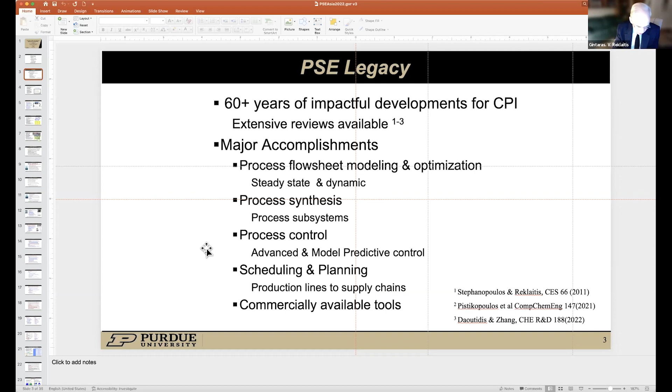Now I'm going to just very briefly recap the key features in each of these technologies. Process flowsheet modeling is now a tool used in the undergraduate program, so very clearly it has permeated the chemical engineering discipline. It started in the 50s with the sequential modular architecture. Over time, constraint handling, flowsheet optimization using SQP approaches, and most importantly, equation-oriented alternatives have developed.

These things have only become possible because of the developments in physical property modeling. Without the model libraries, the databases, the ability to predict properties of mixtures, flow sheeting process simulation would be much retarded. Since those initial waves, group contribution methods and other groups of materials have been characterized with the PhysProps package. Some years ago Dr. Lakshmanan, at one of the FOCAPD meetings, made the bold statement that the sequential modular form of process flow sheeting has now achieved universal adoption. If it did then, it certainly has now.

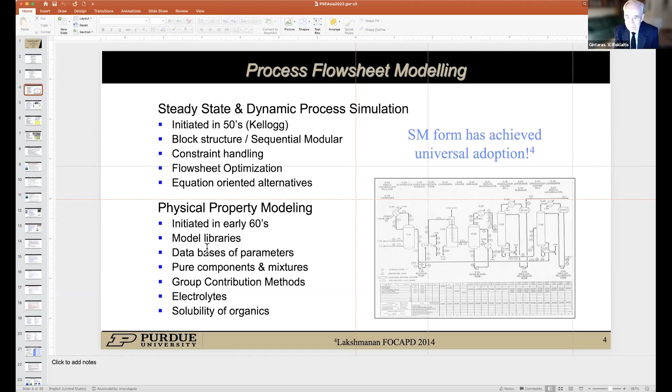In the area of process control, the field has moved forward with data-driven methodology first and foremost, initially in process monitoring using statistical methods, basic feedback control, advanced controller building blocks, various data-driven tuning and performance monitoring systems, and most recently — recent being the 80s — model predictive control, principally linear but increasingly with nonlinear applications, with and without state estimation. The paradigm, seen in most textbooks in process control, is essentially the use of a model to predict how a process should be adjusted over a horizon, and then, of course, the classical solution of only implementing the first period and then repeating the re-estimation process.

A paper back almost 20 years ago by Qin and Badgwell, reviewing the field back then, already claimed that model predictive control is widely adopted in refinery and petrochemicals, and certainly it will be increasingly used in other sectors, such as, for example, the pharmaceutical industry.

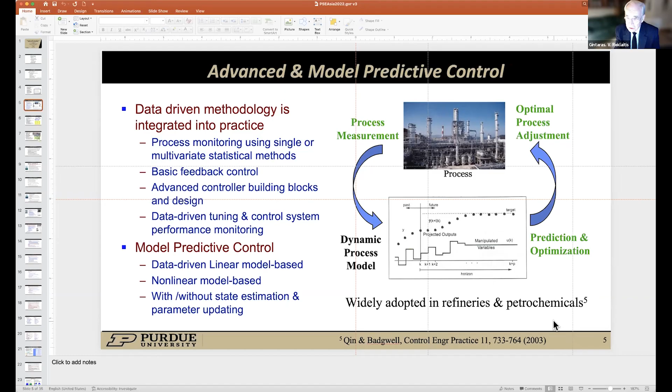The other area of great importance has been process synthesis. Again, a number of problem categories have been addressed, from heat and power networks to separation systems to mass exchange networks, attainable regions. The approaches have really spanned the range from heuristic or thermodynamic constructions like the pinch method, to superstructures, to math programming to solve these superstructure optimization problems, and actually some very interesting work in recent years in systematic enumeration, which boils the superstructure problem down to a smaller set of structures. I think it's fair to say the industrial impact, particularly on the heat and power network side, has been substantial.

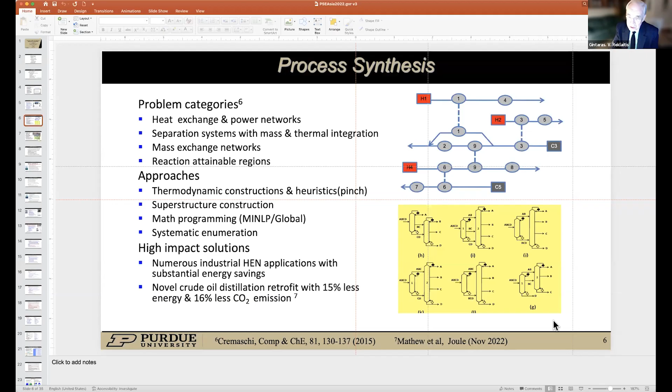Hundreds of papers have been published and continue to be published illustrating how important heat integration and power integration can be. I'd point you to a very interesting application by my colleague's group, Professor Rakesh Agrawal. They just published a paper jointly with colleagues from ExxonMobil in which they demonstrate that by using systematic methodologies, they were able to improve the classical crude oil distillation through a retrofit that has 15% less energy and 16% less CO2 emission. This illustrates that significant progress can be made even in industrial installations that one would think have already been so well polished that there isn't much more room for improvement. A clear example where PSE can still have an impact.

Planning and scheduling has also been a very active area, one that I've been personally interested in, ranging from multi-period MILP applications to refineries, utility systems, water, and so forth. Likewise, in the scheduling area, lots of really exciting progress in terms of how to handle these complex combinatorial problems. A very nice review paper published back in 2014 recaps some of the key ideas. However, the field has kept moving forward, and we recently welcomed the book on scheduling produced by Professor Maravelias, continuing to show that there is significant work yet to be done in this important area.

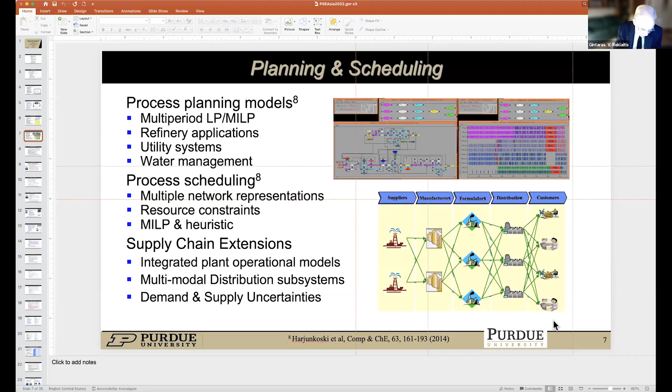As I mentioned, while it's important that the field has made these contributions and published them, it is even more important that these tools be implemented in practice. And it's really noteworthy that there have been many important software implementations now available to industry, and many of these have been really involved, expensive, and long-term developments.

For example, in the flow sheeting area, Aspen Plus originated with an Energy Department and MIT project launched in the mid-70s. The gPROMS work started in the mid-60s at Imperial, and both of those packages are now licensed and supported—in the former case through Emerson, in the latter case recently through Siemens.

In the process synthesis area, there are many applications, particularly in heat and power. On the separation train side, there are a few commercial packages, but lots of academic and in-house work. And of course, in the advanced process control, MPC area, all DCS vendors offer capabilities in those areas.

The scheduling planning domain is really such a broad domain. It goes much beyond process systems—as we practice it, it really pervades all manufacturing. So there's plenty of commercial packages available. I'd mention one that one of my colleagues started some years ago, Advanced Process Combinatorics. Their software has been actively used in industry for the past 20 years. This is an area with continuing challenges just because of combinatorial complexity, so I'm sure we will see more progress as time progresses.

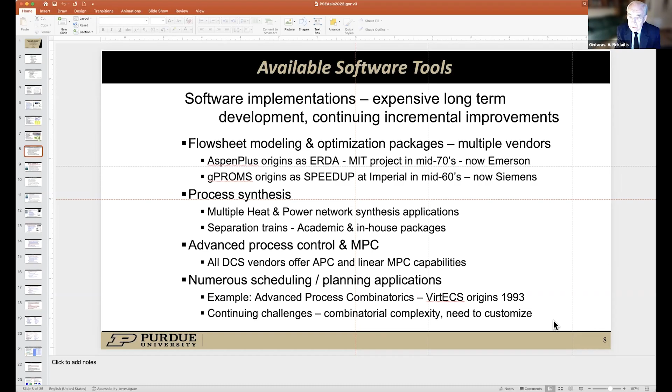Now, in the area of PSE applications, in the past and in the present, our focus has been to support design and operations in the chemical process industries. It is interesting to question what are the challenges in the future.

I'd point you to a recent U.S. National Academy study, published earlier this year, in which the panel reviewed what these grand challenge areas are. They range from decarbonization of energy systems, to sustainable engineering, to targeted and accessible medicine, to flexible manufacturing and circular materials. And again, the panel recognized how important tools are to the future of chemical engineers if we are going to make progress in those areas.

Now, the key features of these grand challenge areas: they all involve large-scale systems, they all require an integrated systems perspective, they're multi-scale in temporal and spatial dimensions, they always involve uncertainty in models, parameters, or data, and they all inherently require some quantitative risk assessment to support these system-level decisions. Most importantly, they also require in-depth knowledge of the application, and that opens them up very nicely to our PSE community, populated by chemical engineers who have a very good understanding of energy systems, healthcare-related issues, and so forth.

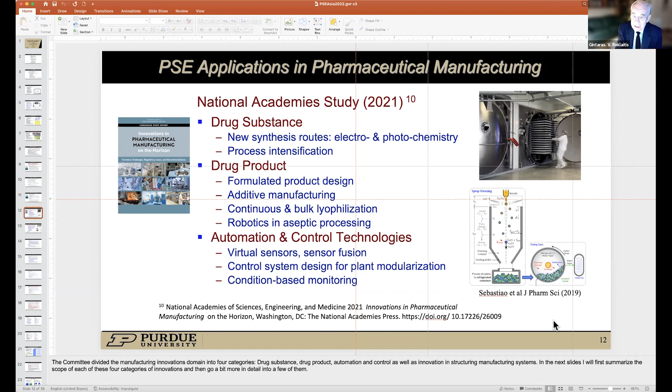There's included in there a discussion of innovative manufacturing networks. Again, something that is core to PSE, where we're not just at batch and not just at continuous, but at highly automated hyper-production lines, which require integrated control and scheduling. The idea of modularization is really important to the industry, and it has interesting questions in terms of control system design, safety, and security. There is even work going on in portable point-of-care systems, which would really, in some sense, be a prime challenge for PSE, because such a system really has to operate with real-time release. That is, when the dosage is produced, the patient can consume it without further quality control.

Of course, the word digital twin again appears in the pharma innovation study as well. So I invite you to look at that document in more detail. I think you'll be amazed at how central PSE is to really innovations in pharmaceutical manufacturing.

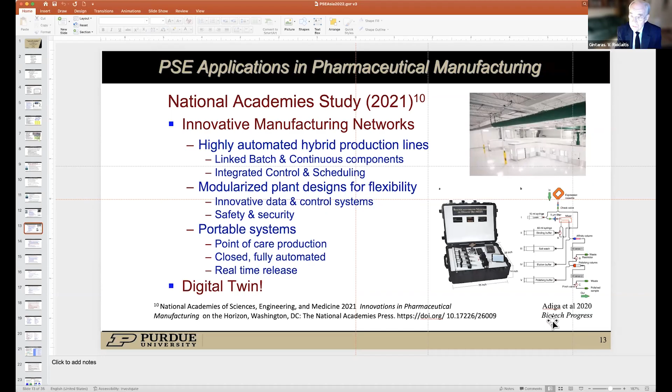So the recurrent themes in the National Academy studies, and certainly in many other studies on the future of manufacturing: increased digitalization in the generation, management, and use of data, the effective use of this data to build high-fidelity models, the use of such models, in this context referred to as digital twins, to guide both the design and to support real-time operations. These are really key parts of each of these studies. And of course, the digitalization and digital twin theme appears in all of them. And, you know, us academic cynics could well say, are these just buzzwords, or does this really represent real change? And what new challenges does this digitalization wave pose for PSE?

The assertion I would make is that from the perspective of PSE, digitalization is not a revolution. Rather, it is a very logical evolution of PSE. And it will be achieved, and is being achieved, by exploiting advances in computing and information technology, which is what our community has been doing since its inception. When you look at all of the areas where progress has been made, it has always been made by pushing the envelope of what you can do with the computing information technology available at that period in time.

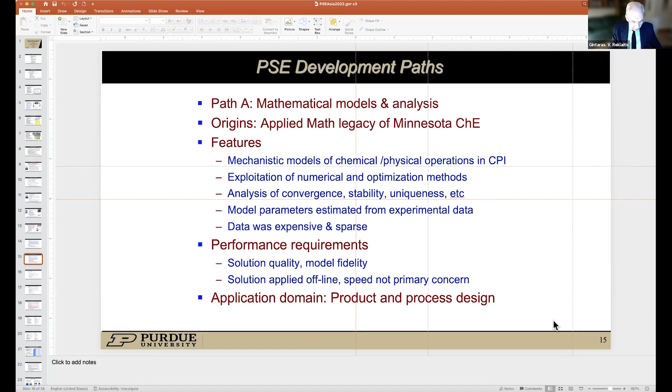The second development path was really the data-driven path, even in its inception. It was really of industrial origin. It was our industrial colleagues who worried about process monitoring and control.

And the features of this path was initially make decisions from data using statistical methods, then build simplified data-driven or linear models or surrogate models to help make those decisions.

The solutions required were in real time, or at least in a time scale that made them relevant to the dynamics of the operation. This was a theme in which data was abundant. The concern was really more about the quality, the reliability, and the dispersed nature of the data. For this development path, the performance requirements were really speed of solution. There was a recognition that the solutions would be updated frequently.

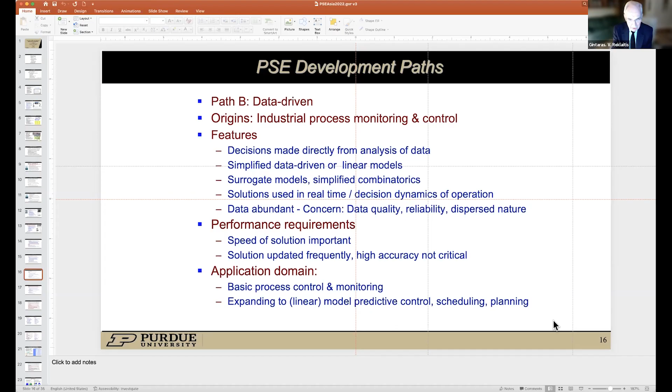Look at linear model predictive control. High accuracy was not critical, however, speed was. And the applications, first and foremost, were in process monitoring and control, and then gradually expanded to model predictive control, scheduling, and planning, where one could make use of relatively simple linear or perhaps mixed-integer linear models.

Now the third path, which is the one that we're embarked with now, the digitalization digital twin, I would view to be a logical merger of paths A and B. It builds on PSE legacy, and it again takes advantage of advances in computing, data storage, access to data at high speeds that we currently are enjoying.

And the features are pretty obvious. We deal with large and diverse data flows from multiple sources occurring at different frequencies and even different levels of accuracy. High fidelity models for design and operations, that's where the digital twin comes in. This high fidelity is obtained by combining the mechanistic with data-driven components, and that's where we get the hybrid models.

And then given what we have available in terms of data and models, a really key component is always model predictions, dealing with the effects of uncertainty, both structural, parametric, and the input data. And of course, for the digital twin concept to be relevant, the digital twin has to change as the process is changing, and therefore model and parameter updating, adaptation using whatever methodologies are relevant, for example Bayesian methodologies, is really, really important.

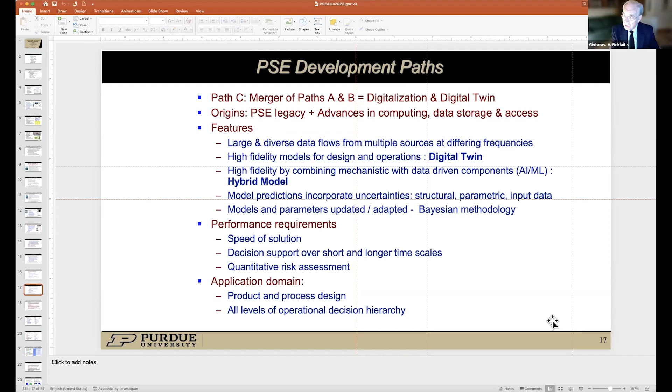Here, the speed of solution does matter, particularly on the operational side - I want to be able to support decisions both at the short term and at the longer time scales. And a decision that is relevant to the modern era has to have quantitative risk assessment. The application domain, of course, is all the domains that PSE traditionally covers, as well as the grand challenge areas that I referred to earlier on.

So given that perspective, then the question is, what more needs to be done? And of course, we always need to do more. We need more capabilities in all of the key areas of process systems engineering.

Approaches in dealing with diverse data and its management remains a key area for research. Effective methodology for building these hybrid models, a software architecture where building and integrating these kinds of models into system-wide models can be enabled. And as always, we need developments to increase computational efficiency and scope.

It is just inherent to PSE that we're always stretching the boundaries of the size of systems and problems that we can deal with. And I will briefly touch on some developments in each of those four areas.

First of all, in the data area, I'm sure you realize that one of the blessings and curses of data in the process and related industries is that the data categories are very broad, both time series and static information - traditional information about streams and unit operating variables, but also information about the status of the resources being used to carry out manufacturing. So status of instruments, of units, of control systems, all constitute important input information for us to make decisions.

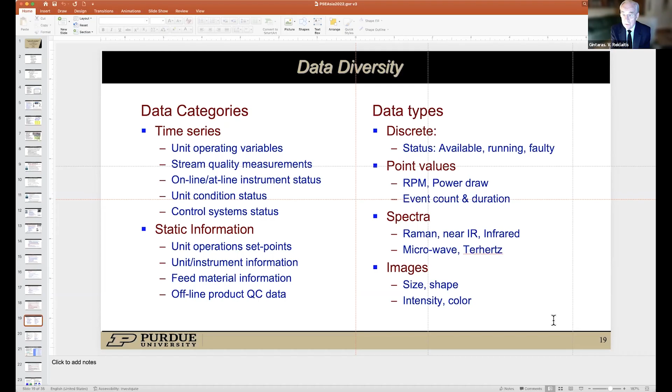Now, given this diversity, the question is, how do you manage that kind of data? Certainly, industry has addressed this by having multiple data repositories, both laboratory information systems, the traditional process historians, information resident on PLCs, MES systems, ERP systems. They have all been implemented in practice.

Unfortunately, they have sort of existed as islands of data. In recent years, there's been a lot of effort in terms of integrating these data into something called data lakes. I think the practice so far has shown that while that is a significant step forward in terms of making this information accessible, it is really not integrated in the sense that it's easy to access all of the data relevant to a given project that may reside in one or more of these systems. And so there is significant work to be done yet in terms of effective data management systems.

Some of the challenges that exist are the fact that there's all kinds of variation in the data quality and data quantity, data fusion, integration of diverse data types in order to allow us to do things like state estimation, where the data inflows into the state estimation model comes from different sources at different frequencies with different error bars on it. How do you take that into account?

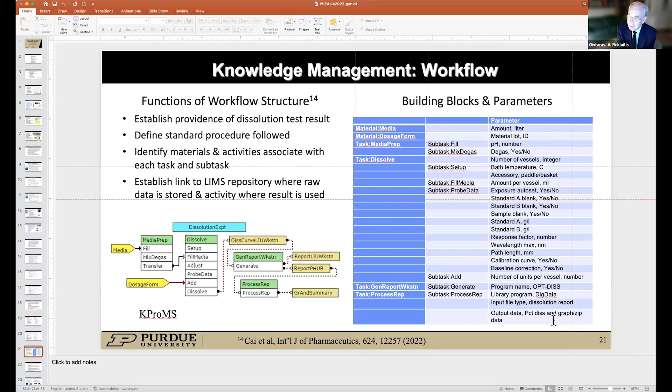I would suggest that if we really want to capture the provenance and the context of the information that our PSE methods will be using, we need some kind of structures that will allow us to do something like this. Now, this is rather primitive. I'm sure there are much better ideas that will come forth.

Let me next talk about the second area of PSE relevance, which is that of methodology for building and adapting hybrid models. Certainly the notion of hybrid models is not a new thing. One sees components in the literature appearing already in the 1990s.

The principal difference, as is pointed out in a very nice review paper by Sansana and co-authors, is they sort of looked at the development of hybrid models as sort of a balance beam, where when you think about it, in the path A of PSE developments, the heavy weight was on the mechanistic side. The data-driven was pretty thin. In the big data era, the reverse happened. And of course, the challenge is to balance that appropriately.

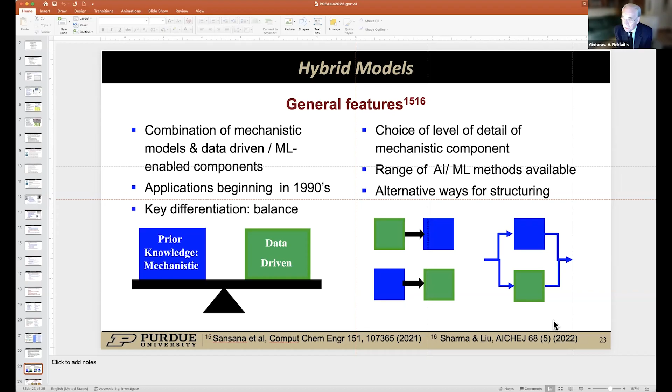As a simple example, I'll show you a pharma application. On the left-hand side, we see a continuous process going from feeders to a tablet press, and the unit operation in the middle is a roller compactor. That unit operation essentially consists of a mechanical device with two parts: a compactor, which takes powders and compresses them into a ribbon, something like a chewing gum ribbon, maybe a bit larger. Then the second part, a two-stage mill, which chops that ribbon up into granules.

The inputs for this kind of model are shown on the center bar—things like feed screw, roll gap, roll pressure, and so forth. There are inputs for the mill section as well, in terms of screen size, screen gap, and mill speed. And there are outputs: throughput, ribbon solid fraction, ribbon thickness. Some of those outputs serve as additional inputs to the mill model, which then produces size distribution.

This is an example where you have aspects of both the serial and parallel structure—a relatively straightforward model that has a mechanistic component dealing with the mechanics of compression of powder and producing a ribbon, a model that takes into account the material relaxation that occurs when the material leaves the rolls, and of course a machine learning milling model.

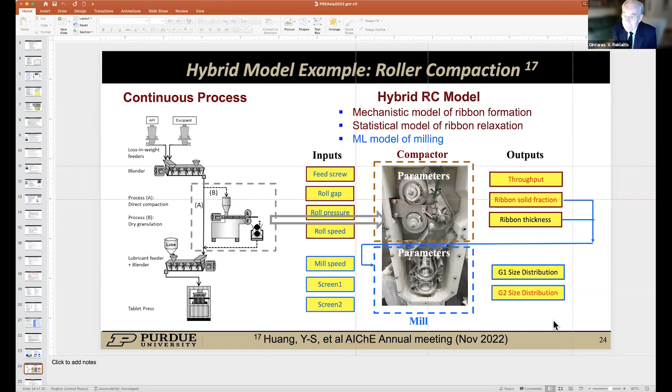One could certainly write population balance models with a breakage kernel for this part of the process. But breakage kernels are typically data-driven models, and people have worked on using machine learning to make those models better. So it's just a simple example of a hybrid model, and clearly there will always be parts of the process where our ability to write mechanistic models with sufficient fidelity is going to be challenged. If we really want to track the process closely, we're going to need machine learning components to it.

So in the area of hybrid models, there have now been several review papers. I will just recap what these are. Certainly, model identification is really a key requirement—we have to build a machine learning model, and come up with the parameters of the mechanistic component. Validation is always a key issue.

Increasingly, people are starting to worry about building hybrid models in a data-sparing mode. The key here is to bring the hybrid model up as quickly as possible, so you don't need an enormous set of data to work with. So how can you build an effective model that is data sparing? Of course, the hybrid model needs to track reality, which changes, so strategies for adaptation of the model are important.

I maintain that any model used to make decisions needs to have prediction of confidence or credible regions, depending on whether you're a Bayesian or a frequentist statistician. The enablers for building these models are really flexible software environments, and this environment needs to be transparent so that these hybrid models can be built, managed, and adapted, and facilitate combining these models into system network models.

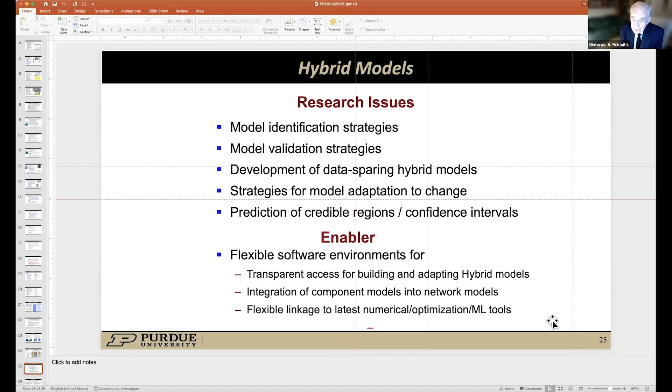Just by way of example, I thought I would show you a development you may not be familiar with, which is the IDAES platform. This is a development launched within the U.S. Department of Energy. It involves several academic partners in addition to the national laboratories—I think colleagues at CMU, West Virginia University, and even Notre Dame are involved. The goal of this project was to provide advanced PSE capabilities to support design optimization of new processes.

The key goal of this effort was to address the weakness in existing systems—the conventional process simulation packages such as Aspen Plus, and algebraic modeling languages such as GAMS that provide functionalities very desirable from an optimization point of view. The simulation packages typically don't do well in optimization because, to a large extent, the optimization occurs through the black box framework.

It's complicated to add new non-standard dynamic models or to modify the existing models, which are often hidden. And of course, uncertainty quantification is difficult within those packages other than simply Monte Carlo. On the other hand, the algebraic modeling languages really are not set up for building reusable process models. They don't make it easy to integrate model libraries, properties, those sorts of things we're used to having in building process models, and they're challenged in terms of handling multiple time and length scales.

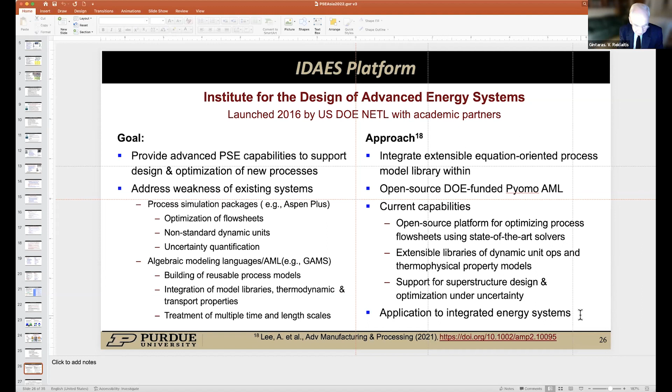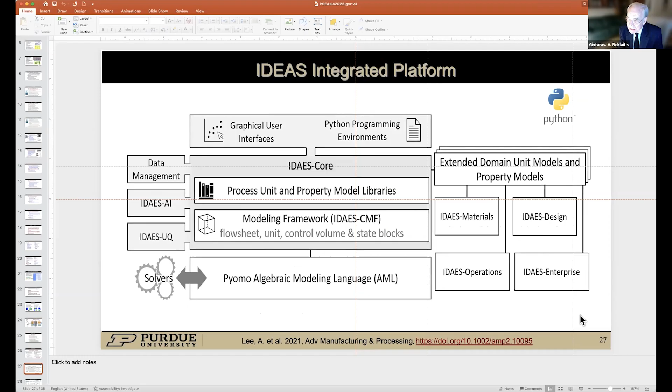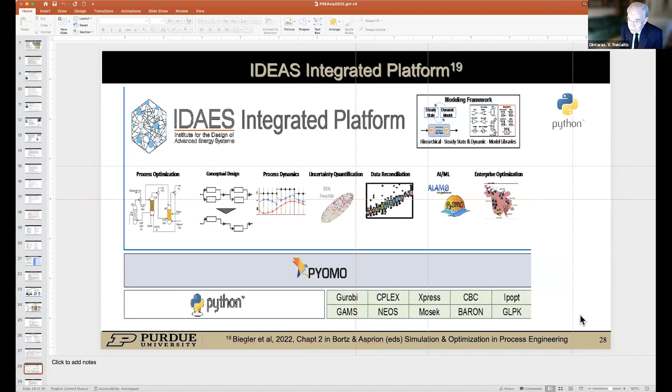The IDAES platform basically does the usual process unit and physical property models. However, it lends itself to being extended in multiple dimensions, and I think most importantly it seeks to provide multiple functionalities: process optimization, conceptual design through superstructures, process dynamics, uncertainty quantification, data reconciliation or state estimation, AI/ML methodologies integrated, and even surrogate models integrated, and even enterprise optimization through suitably structured models, all using the Pyomo kind of framework to allow ready access to the latest developments in the optimization domain.

The key points here I'd like to leave you with: this is an exciting development, however it is not without its challenges. By virtue of creating a Python-based framework that allows convenience in building and accessing open models, it really is a platform suited for a user that can do that. This is not something you can turn over just for routine use, as you might with an Aspen Plus simulation and an existing library of models.

The building of equation-oriented models, which is key to the IDAES project, requires expertise. Although IDAES does offer some really nice modeling constructs in terms of assembly of material and energy balances, nonetheless, building robust equation-oriented models is not a skill that most researchers have without digging into it to some extent.

The other key problem with equation-oriented models, of course, is initialization. Whether it's solving a set of nonlinear algebraic equations or initializing an optimization model, how to do that effectively is still a research issue. Currently this is done through trial and error, through use of simplified models and lots of tricks that practitioners build up, which create a barrier for broader use.

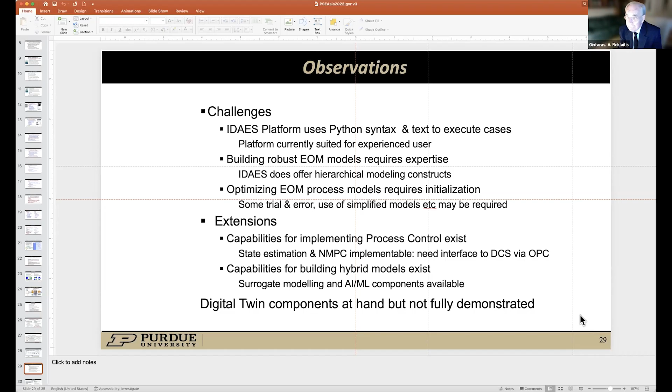Now, just in a small way, I'd like to point you to another development that borrows, to some extent, from the IDAES project, which we've carried out with my colleague Zoltan Nagy at Purdue, and that is to build PharmaPy, a Python-based tool for simulating pharma processes, which takes advantage of this idea of text-based construction of applications with lots of flexibility and user control by virtue of the Python environment. Open source lends itself to access to extensive libraries.

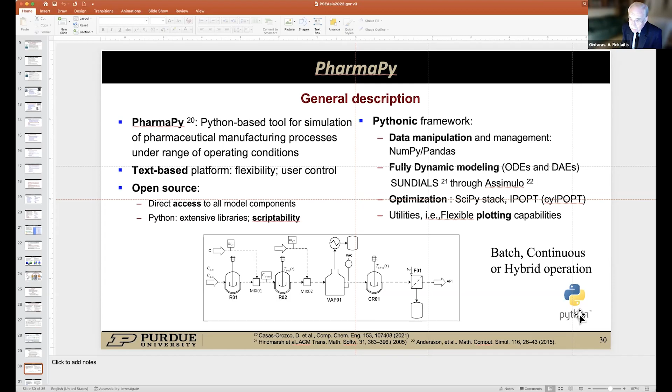It allows convenient data manipulation using data manipulation tools, numerical methods to do dynamic modeling, to do optimization, and to carry out various supporting tasks where one can access Python-based tools. Now the application this was focused on, under FDA support, was really to address batch, continuous, and hybrid operations, allowing one to mix and match these unit operations and model these kinds of processes. General features are object orientation, an easy way of adding new models, and providing a convenient framework for doing the estimation.

I should point out that one key limitation is that we use the sequential modular strategy, with some refinements of how to handle dynamic models. By virtue of using the SM approach, it is restricted to doing optimization using black box and gray box strategies.

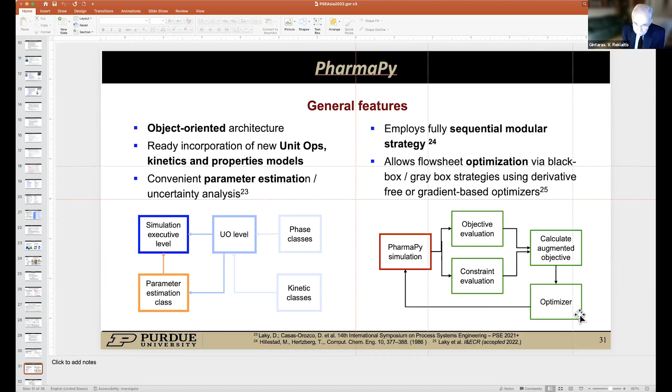These are just examples of software environments that are needed in order to address the hybrid model and its use in both design and operations.

I would say the existing simulation packages really don't lend themselves to the full use of the hybrid concept, although one has to give credit to the teams involved that they are trying to head in that direction, but they're not there yet.

Having now a software environment that allows you to build hybrid models and to assemble them into networks, then the remaining question is how to address the computational challenges that these models involve. And if you think about it, in order to make the hybrid digital twin kind of concept practical, we have to deal with some important computationally demanding subproblems.

Parameter estimation, training of machine learning models, even doing Bayesian modeling or Bayesian hierarchical modeling in order to handle uncertainty. The optimization of large-scale systems, stochastic programming. All of these are very computationally demanding.

Our community is used to tackling these kinds of problems using decomposition and algorithm engineering methodologies. I think we will need to do much more of that in order to be effective. Certainly, our community has not ignored high-performance computing architectures that are available. I would say, however, probably not to the extent that we could. There is work to be done in exploiting that.

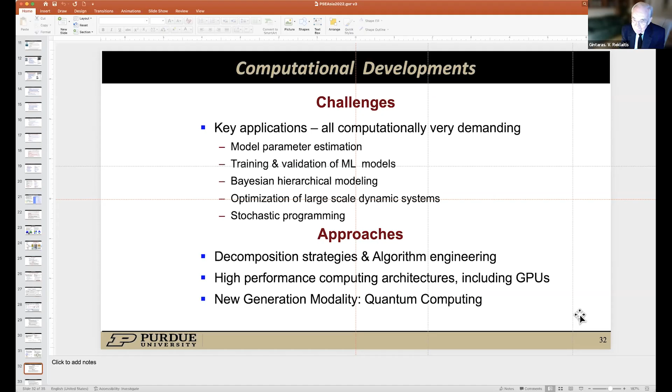I would just call to your attention a very interesting perspective paper that was just published earlier this year by David Bernal and some colleagues, both from academia and from industry, in which they raise the community's visibility of the potential of quantum computing.

This is not a new development. It's been around since the 1980s. The key issue has really been demonstrating that indeed the use of QC will accelerate some of the computational tasks that we want to address.

In the review paper, Bernal et al. point out that for chemical engineers, there's really three areas of potential application. The number one is the computational chemical molecular simulation area, which shouldn't surprise you too much. The other is discrete optimization, and the third is machine learning.

And they point out in the review paper, I won't reiterate for you, some of the initial work that's being done in this area and what one might expect down the road.

There are still lots of limitations, so this is really kind of bleeding edge development. There's limitations on the size of hardware realization that currently exist. There are a fairly small number of accessible QC hardware installations that researchers can use, although there are software emulations which can be used to test ideas. And in general, the basic software ecosystem is not well developed as yet.